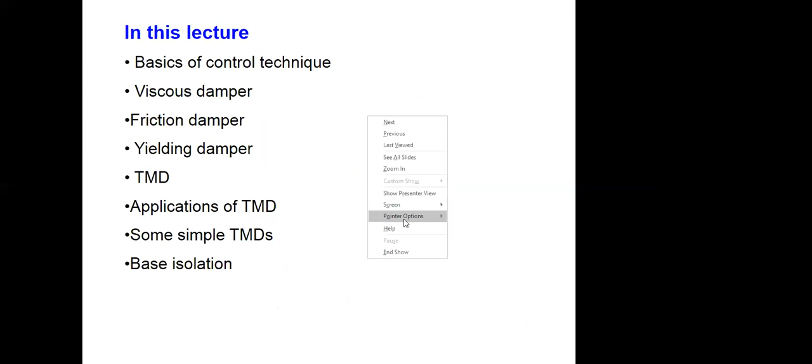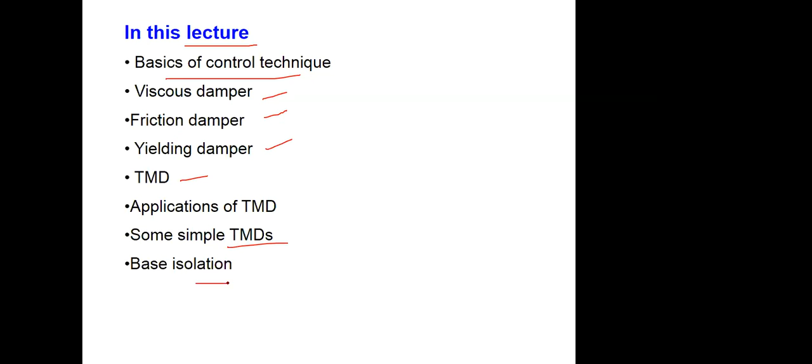So the broad outline of today's lecture is what is the basic principle, and then various types of dampers, particularly in earthquake engineering, which have been deployed and used: viscous, friction, yielding, and then tuned mass damper, TMD is the short form of that. Applications, some simple TMDs, and then we will discuss something about base isolation.

Before we go further, let me show you this video of an experiment done in a lab, but the building is almost full size, on a very big shake table. This facility is available in Japan, E-Defense. If you Google search E-Defense seismic testing facility, you will get a lot of such videos. So let us see how a structure vibrates during earthquake. This building is kept on the shake table, and in the lab that shake table will be operated.

Okay, so that was one. I think I don't know how to revert it. Okay, I want to play it. Yeah, it has played again.

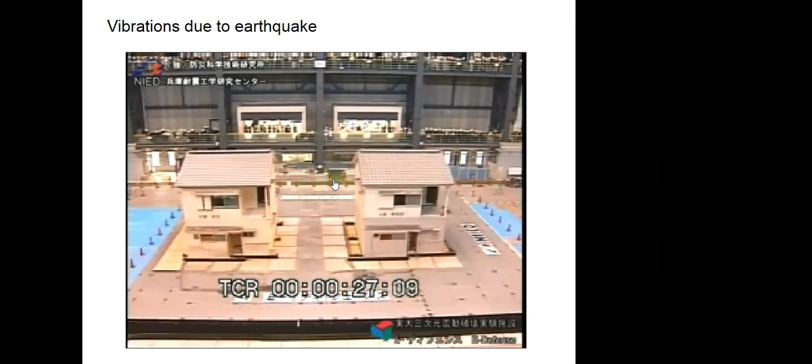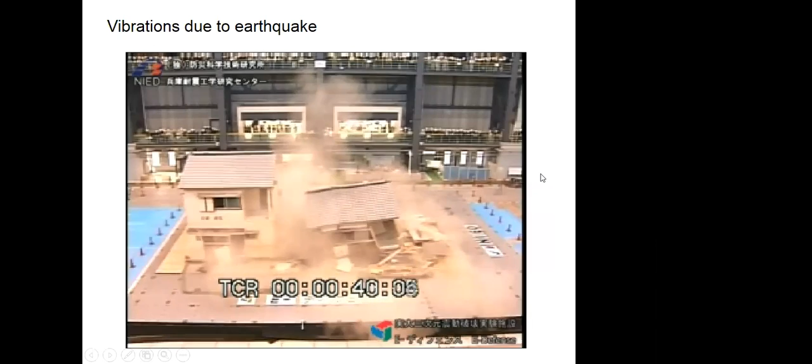Okay, so that is how things vibrate during earthquake, and we have to see how we go about controlling them. Now what are the parameters which affect the vibration? Of course, one parameter will be weight or mass, column size, stiffness. As by now we know the most important parameter or dynamic characteristic of any structure is natural frequency or natural period, and this natural frequency omega is under root k by m.

So how structure will vibrate will depend on what is its natural frequency. That is one of the most important things. Of course, then there are mode shapes, there are modal mass participation in various modes and things like that. Another very important one is damping. How much is the damping?

So if you want to control, one can always say that increase the column size or do something with the weight, change the natural frequency of the structure, your vibration will be different. So that is one way. Another way is that you enhance the damping. So somehow engineers have to play with these parameters. So for controlling, damping is the one which is dealt with in detail.

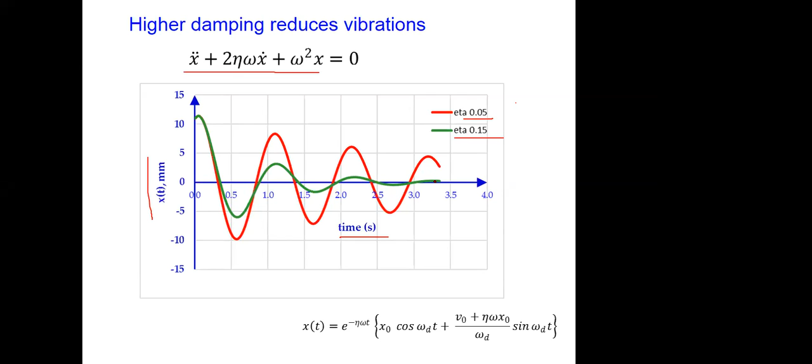So if eta is 5%, then vibrations are in red color. This is how it will die down. On x-axis we have time, on y-axis we have displacement. Now, if damping is made 15%, 0.05 means 5%, 0.15 means 15%, then vibration will start in a similar fashion, but now amplitude reduces drastically. So that is the effect of damping. If damping is more, vibrations will be less.

So damping controls the dynamic response in resonance band, resonance region, very effectively. So damping we have to enhance. Damping is our bet. We have to play with the damping. Now how to increase the damping?

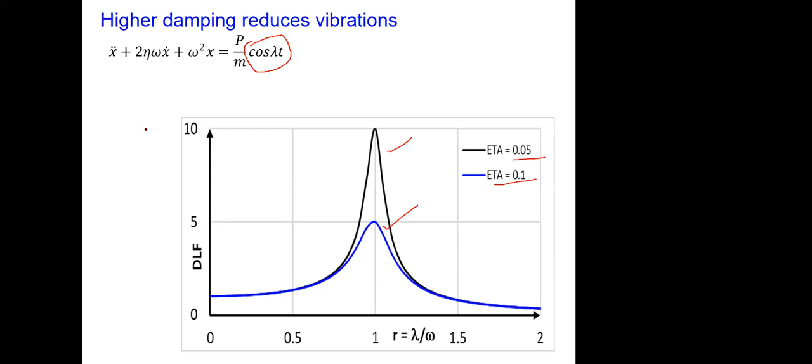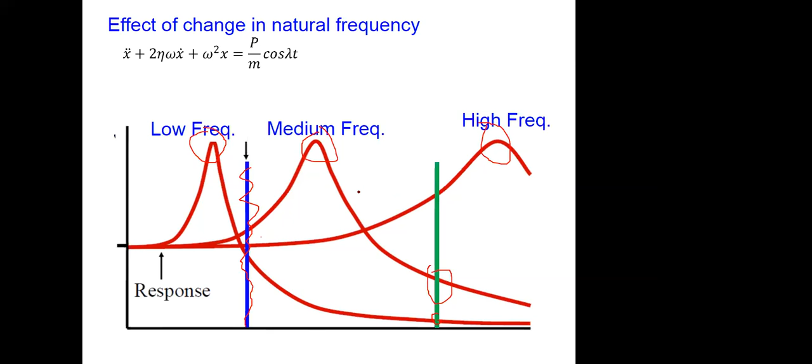Now, how to increase the damping? We have to increase the damping of buildings, structures, bridges, chimneys. But mechanical engineers very effectively increase the damping of a vehicle. All our four-wheelers, two-wheelers have suspension. They have a suspension unit. That suspension unit is nothing but the damping unit.

Now, if you put a different quality of liquid, or if you put more suspension units, then the damping of the car will increase. Then the car will have better ride quality. That is one of the differences between a low-cost car and a very costly car. Ride quality is good; they have better suspension. They have less noise and all sorts of things. But this is one of the criteria.

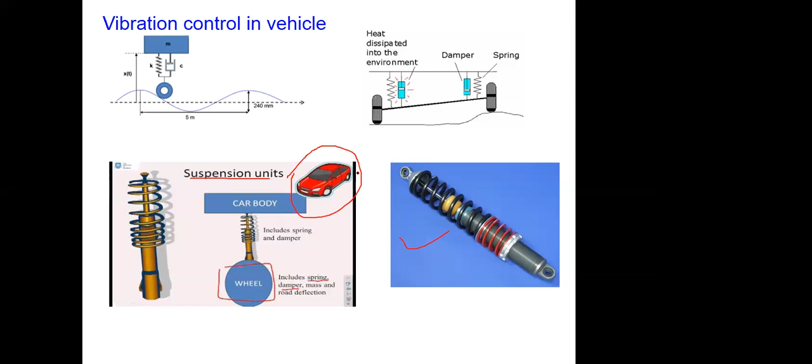Though there are other aspects also. We have passive control aspects and active control aspects. Active control means the control mechanism should come into picture when the building starts vibrating; otherwise it should not. Passive means that the mechanism lies there, like the suspension unit in the car. It is always there 24 by 7, whether the car is standing or traveling, though it comes into picture only when the car is traveling. When the car is standing, the suspension unit doesn't have any role, but it remains there. So that is called passive.

Something which remains always there, whether it is useful or not, whether the structure is vibrating or not, is known as a passive control device. An active control device is driven by a power supply. Only when the structure starts vibrating will the liquid, piston, or some other mechanisms come into picture, and they will generate an equal and opposite force, or they will absorb energy. Once the structure stops vibrating, this mechanism will also become inactive. So that is known as active.

And then there are various versions: combined, semi-active, hybrid. There are many types of devices. This table is useful particularly for students who have some curiosity in this field and want to go further. We will concentrate on passive control devices: yielding devices, friction devices, viscous damping devices, tuned mass dampers, tuned liquid dampers. Some of them we will discuss.

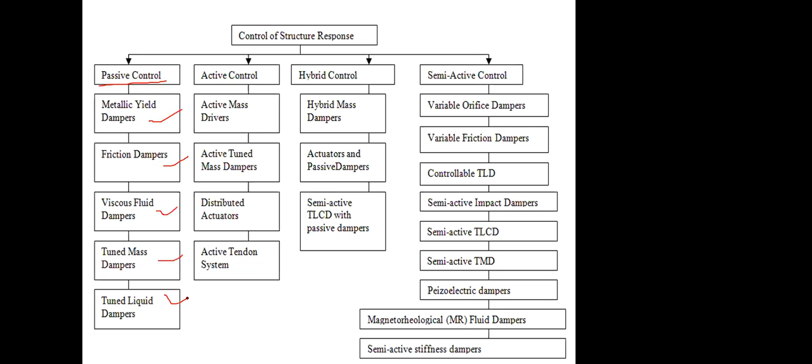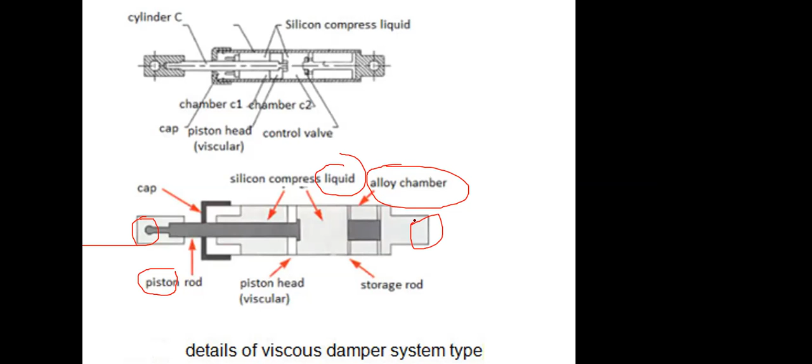Viscous damper. Typically a viscous damper comprises a piston and a chamber, and this is filled with liquid. One end is fixed on this side, another end is fixed on that side, and when there is relative movement between these two ends, the piston moves in and out against the liquid, and that provides the damping. These have been deployed in many structures.

Now, look at the suspension device of a car, the suspension device in a railway coach, and now look at the size of the suspension device in a building. The building is huge, so you will require very big suspension units. Nevertheless, as you can see from this figure, they have actually been fitted into buildings and bridges also. This figure is of a bridge. This is a building, this is also a building. So they have been deployed, and they have been effectively useful.

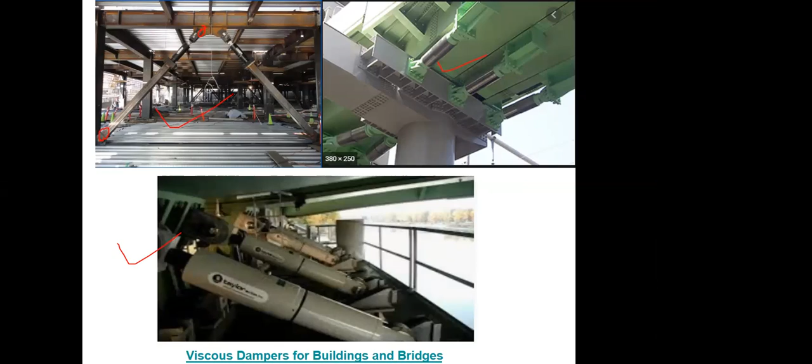Okay, so this one will tell you clearly that it doesn't obstruct the functionality of the building. It is very close to the wall, going from this end to the diagonally opposite end of the beam column joint and things like that.

And just to demonstrate how this works, there are two models in this video. One model is without viscous damper, the second model is with viscous damper. Now this is there on the shake table in a laboratory. They will start the shake table, and then you can see the distinctly different behavior. So let me play this video.

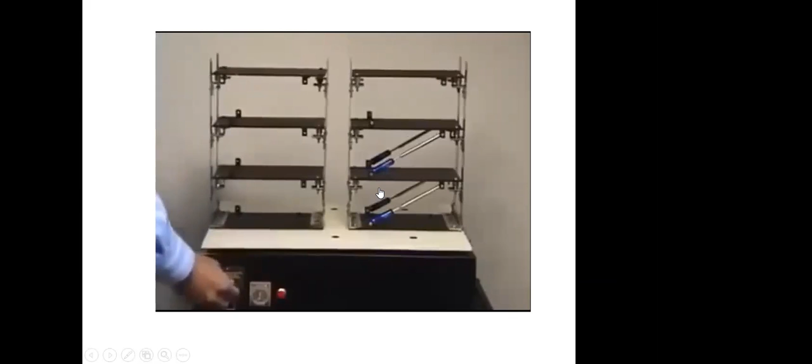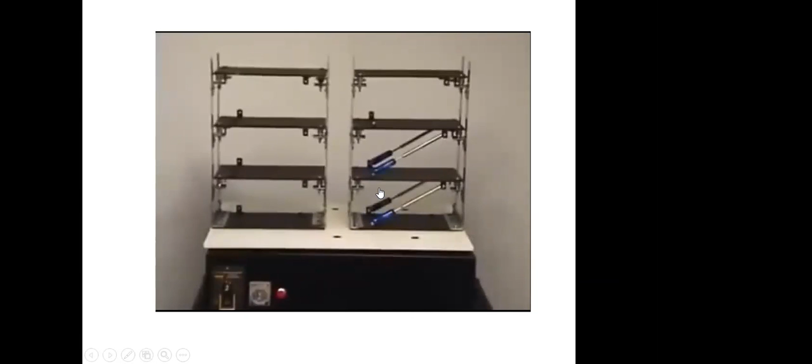See clearly the effect of the viscous damper. Vibrations have died down almost. This one doesn't vibrate at all, whereas the device without damper vibrates. Now how has damping come? Damping has come because of the viscosity of the fluid. That piston moves against the fluid.

Then there is a mechanism behind that. There is a theory behind that. There is maths behind that. One can work out what should be the viscosity of the liquid, how much should be the piston area, how many such devices should be applied, and what are the locations where they should be applied. So all that is a part of the work to be done by the designer, by the structural engineer,

so that they can effectively optimize. They have to find the optimum. You should not put too many; you should put the optimum number of devices. The next is the friction device. Let us see. There is a video here, so let us play that also.

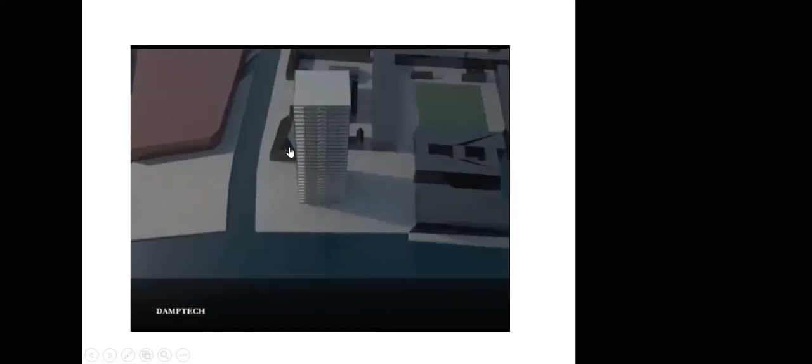Some of these videos are from commercial companies, but since they are good as far as clearing the concept is concerned, I have taken them. This is how friction works. See, there is a relative movement, then this will rub against this, and then friction. This will get heated up and will consume the energy. So that's a good demonstration of how a friction device acts.

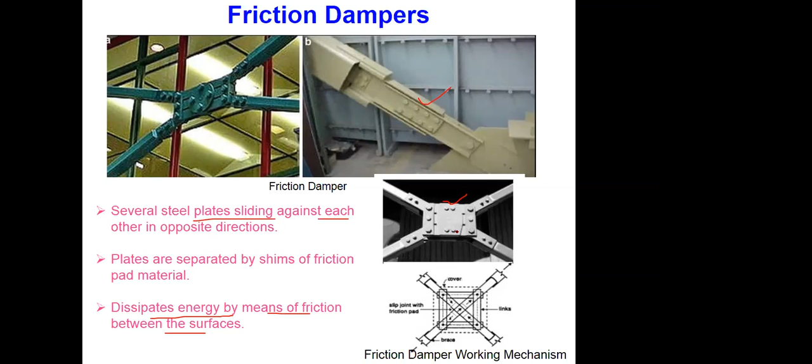There are many examples across the world where friction devices have been deployed. Excuse me. So they dissipate the energy by friction. It gets heated up. And one of the plates has to slide against another one. There are various ways of doing it. This is one way of doing it. There is another way, where there is a friction plate.

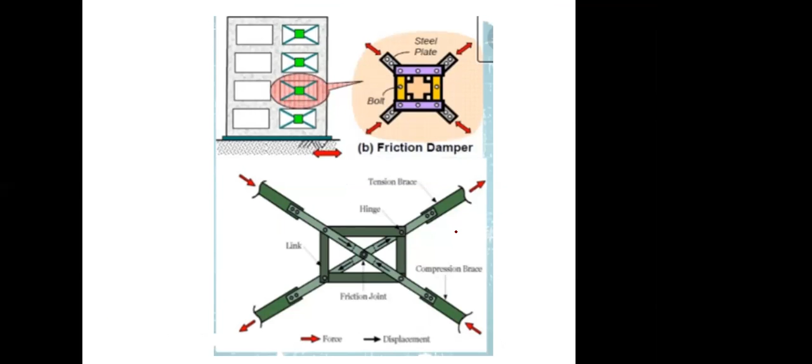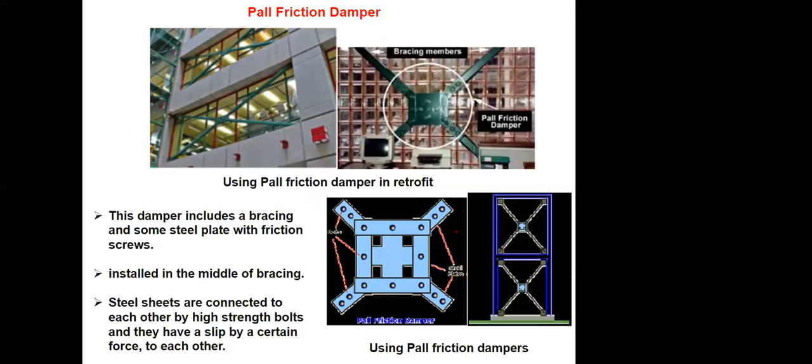And you will find a lot of literature wherein these things have been explained. This figure which you are seeing is from Earthquake Tips, and that is available on nicee.org. In one of the earlier lectures, I think I told you about that website. There you will find a document by the name Earthquake Tips, EQ Tips. So these are the friction devices in various forms. And since the aesthetics of the building should not get disturbed, they combine it in such a way that the building also looks good.

Yielding damper. Now, what is a yielding damper? See, the best example of yielding, if we have to understand, is bubble gum, chewing gum. Chewing gum always yields. The moment you try to stretch it, it yields. Look at a rubber band. A rubber band doesn't yield. It gets elongated, but you remove the force and the rubber band will come back to its original position. So that is elastic deformation.

Whereas bubble gum, the moment you stretch it and leave it, it doesn't come back to its original position. That is plastic deformation. So this difference we should understand. In rubber band stretching, whatever potential energy is stored is released once it comes back. Work done. Whereas bubble gum doesn't come back. So whatever force you applied has gone into stretching it, and it doesn't come back.

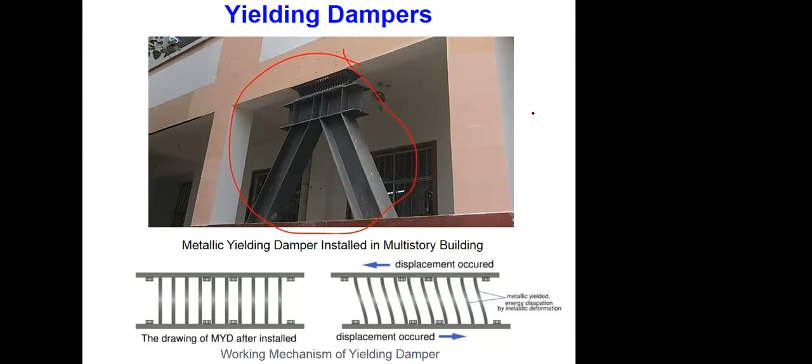So what they do, if I can demonstrate with the help of some more figures, there is a device like this. There is a top platform and a bottom, and there is some sort of V shape, two V's. This is a notch area, a very small area. Now if the top portion is connected to one part and the bottom portion is connected to another part, and there is a relative movement between these two parts, then this smaller cross section gets yielded, it fails.

Now, metallic failure is always a ductile failure. So since this is made up of metal, it yields. So when the part is vibrating this way and that way, this fellow also gets yielded, and in the process it consumes energy. So that is a yielding damper. There are various forms of that: this honeycomb type, and then thick and thin plate.

Now I'll show you a video, because by now we have discussed three types of dampers: viscous damper, friction damper, and yielding damper. This video is a bit longer, but it will be good that you see this, so that we understand various aspects. There are some persons involved. This is, I think, from some documentary for a television program. So please have a look at it, and then we will discuss further.

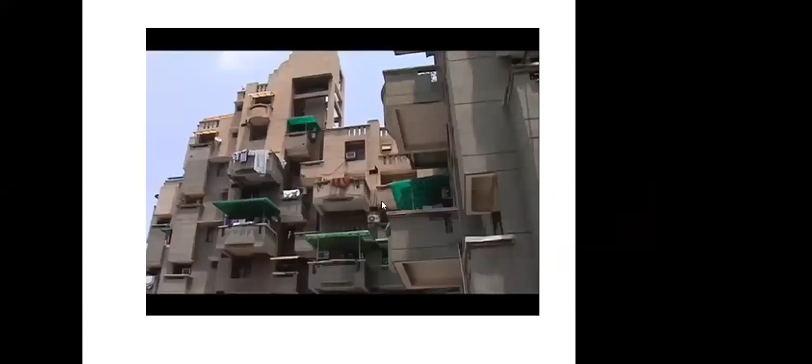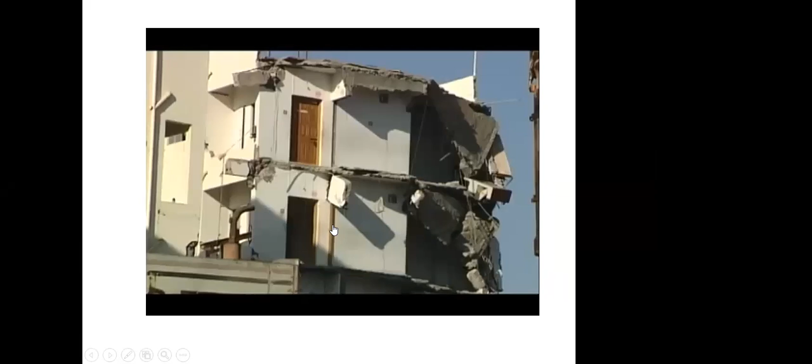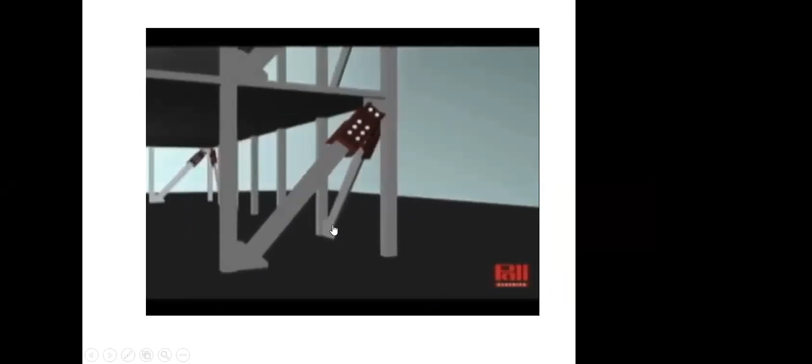Conventionally constructed buildings in India follow an old logic. The stronger and stiffer the building, the more structural muscle it has. But past examples prove that these common reinforced concrete or RC buildings fall apart during... modern science presents a solution where buildings are retrofitted with modern devices known as dampers. A damper is literally like putting a hydraulic shock absorber to brake the shaking of a building during an earthquake. The damper will dampen the displacement, which means minimize damage. Whenever there is a horizontal force, the building starts swaying, and the friction damper will start slipping. The minute it starts slipping, it is dissipating energy.

Now, what does an earthquake do? Earthquake pumps energy into a structure, but the structure is absorbing the energy. We want an external device to be installed which will dissipate the energy, much like an automobile brake. India has just begun toying with the idea of seismic dampers. Important structures like hospitals and now upscale residential buildings have adopted the most basic friction damper. These are steel braces that slip against each other, absorbing the massive energy produced during an earthquake. This is an example of a friction damper installed in this stilt building in Gurgaon.

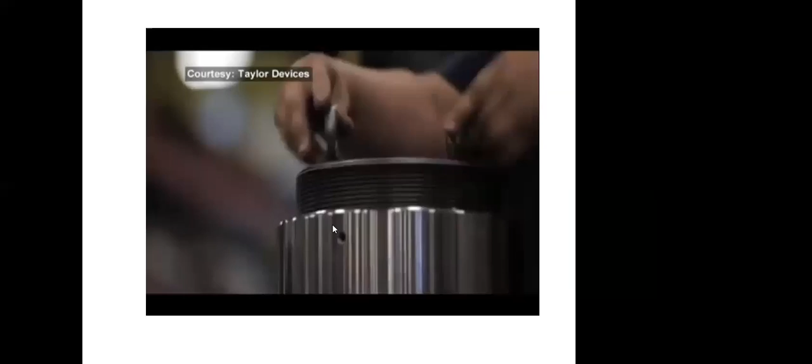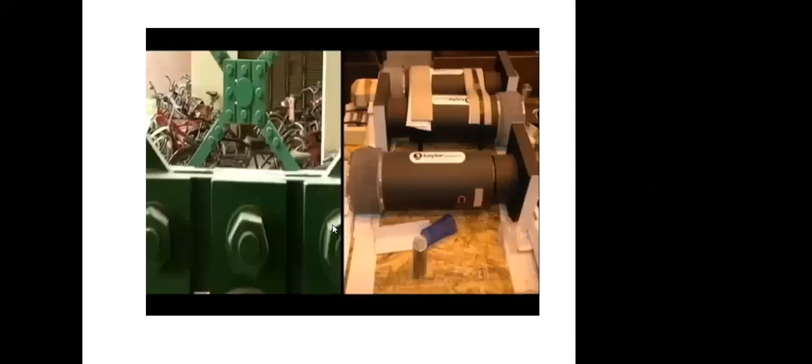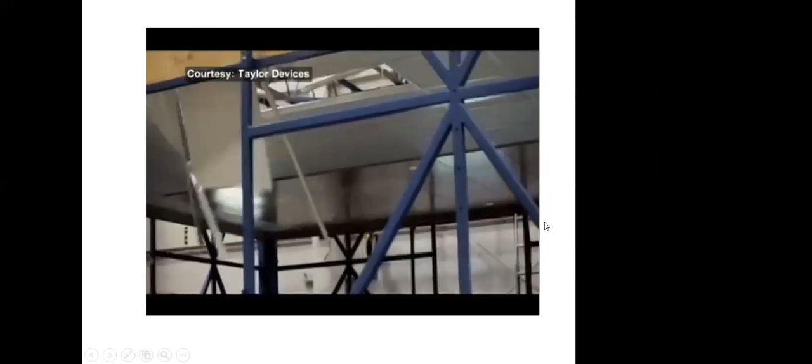Considered the most affordable by structural experts, friction dampers are known to last you a lifetime, with maintenance limited to just painting them regularly. Viscous dampers are the other type. They are piston-type cylinders that contain a silicone-based fluid to soak in the earthquake energy. Friction dampers are estimated to cost about 30 rupees per square foot, while viscous dampers come in a higher range, suitable for commercial structures. But mostly international players offer these two damping solutions in India. So how will we undertake a nationwide retrofitting effort if dampers demand big investment? IIT Delhi says it is close to a solution. It is testing out a prototype called the yielding damper, which it is targeting for the masses.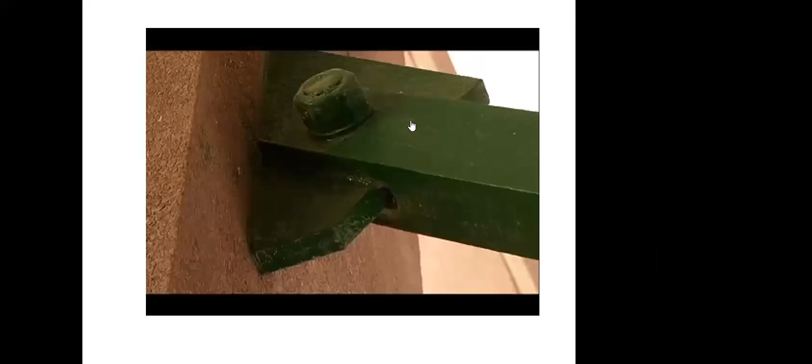So that was some documentary on this. So dampers are useful. They help in reducing the vibrations during earthquake, and even during wind. And now we discuss the tuned mass damper. TMD at VNIT, we have done a lot of work on this. Many of our past MTech students have worked on this. So maybe this I will explain in more detail. We have another 20 minutes or so.

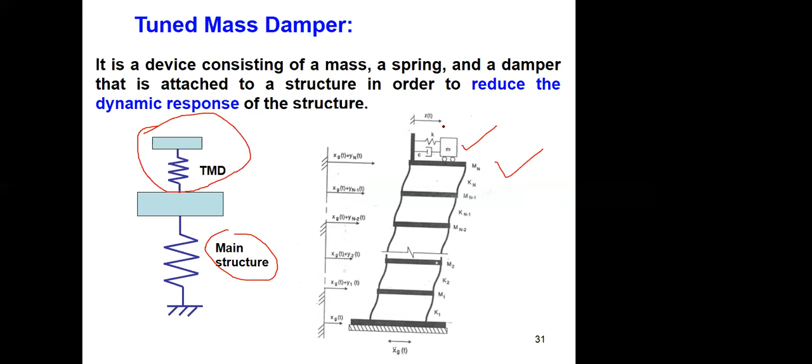So TMD is nothing but a secondary device which is kept on the main structure. Like this building shown here, and this single degree of freedom system, with mass, stiffness, and damper, kept there. So during an earthquake, this will vibrate more and the rest of the building will vibrate less. Now, how does it work? If you have to see that, again there is some animation available for that.

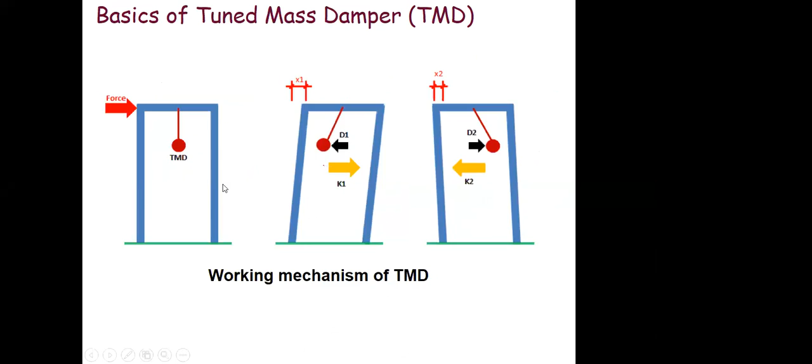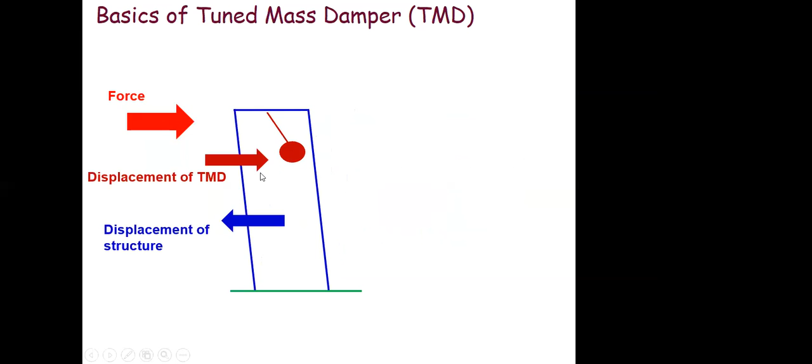If force is applied like this, the building will go from right to left, and this pendulum will go from left to right. The pendulum is our TMD. There is another video to demonstrate this. This fellow is the TMD, a pendulum kind of thing. PTMD, pendulum TMD. This is without control, no control. So let us see in this video how vibration gets controlled because of this pendulum. Pendulum vibrates more, building vibrates less. So with that background, let us see this video.

Right now the pendulum is locked, so it doesn't vibrate. It is vibrating along with the building. Now they have unlocked it. See now, the pendulum is vibrating more, the building doesn't vibrate. The second building is continuously vibrating. So let me play it again.

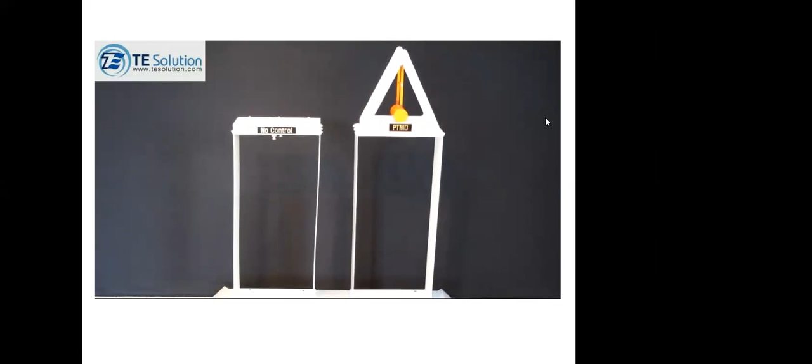So because of the TMD, this building vibrates less, and this building vibrates more. It has no control. Okay. So now this TMD, just to tell you a few things about it: its mass is MT, its damping CT, its stiffness KT, whereas the main building's mass is M, damping C, and stiffness K.

So how is a TMD quantified? It is quantified in terms of mu, the mass ratio: how much will be the mass of the TMD as compared to the mass of this building? And if you go further, it is quantified in terms of frequency ratio: what will be the ratio of the natural frequency of the TMD and the natural frequency of the building, and damping of the building and damping of the TMD.

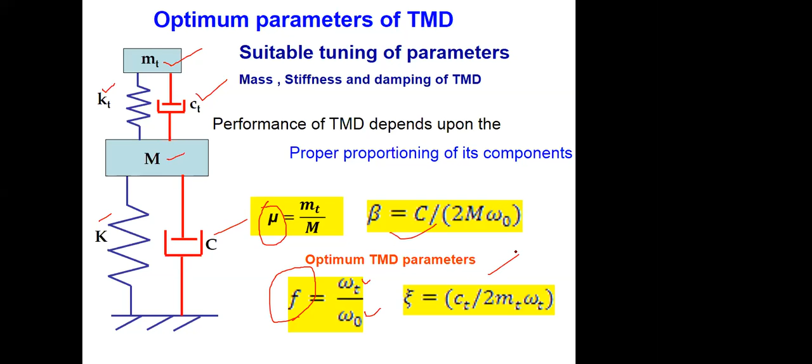So a lot of people have done research in this field, and they have given some optimum parameters, that you should have such and such value of frequency ratio, such and such value of damping ratio, then the TMD's performance will be best.

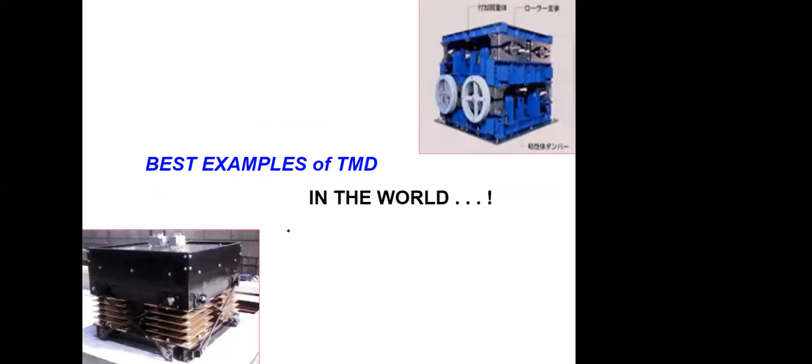Now I'll show you some of the pictures wherein TMD has been used in some of the buildings across the globe. A very famous example is Taipei 101. That building is about half a kilometer tall. Till a few years back, that was the tallest building in the world. But now, of course, the Dubai Burj and something else must have taken over. The Dubai Burj is almost 0.8 kilometer tall; this is 0.5 kilometer tall.

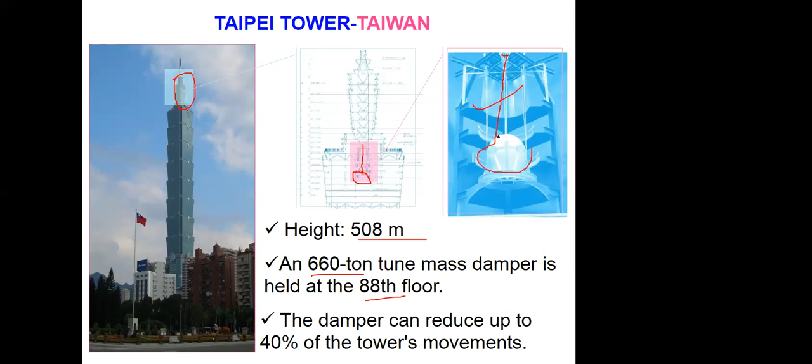So this is that. Now, so that this pendulum should not swing too much, they have put dampers also here. You can see these are viscous dampers. This is the schematic representation. So that is Taipei 101, very good. There are other buildings.

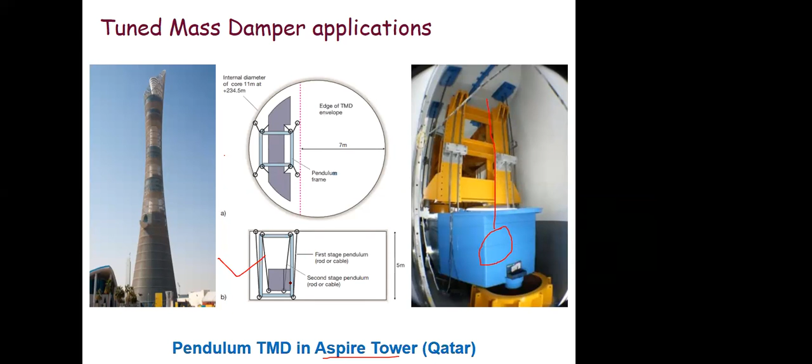Now see, this is in Qatar, Aspire Tower. Here also something has been suspended, and this is the mass. This is the heavy mass which has been suspended like a pendulum, and then it works. This schematic is shown here in this figure with the help of ropes. So this is a pendulum type TMD.

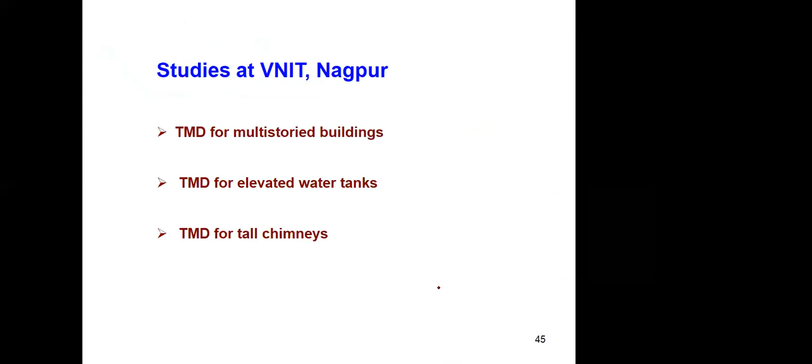Now some of the studies which we have done at VNIT, I will quickly take you through. We do it for buildings. Now what is the aim we kept? We said that in a country like ours, if you put a TMD like this, it requires maintenance. Springs will have to be oiled regularly, so inspection will be required regularly, because if this TMD gets rusted, and after 10 years there is an earthquake and it is out of place or non-functioning, then things will go wrong.

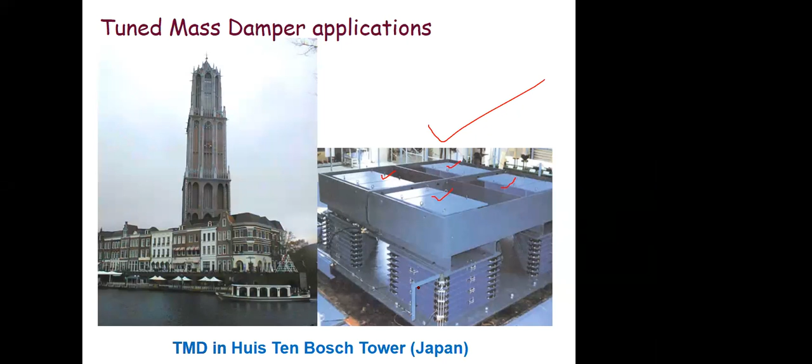So that should not happen. So what is our aim? We said that our TMD should be simple. Like we have an RCC building, let us put another RCC story here, which will be some sort of weak story. Its column size and beam size will be different, its slab thickness will be different, it may have walls or it may not, but it won't require any maintenance or any additional fabrication to construct it. The way our laborers are constructing the RC frame for the lower stories, the same way they can do this.

And its tuning is done properly, column size and everything is selected properly, so that during an earthquake this will vibrate more and the rest of the building will vibrate less. Now this top story vibrating more will be more dangerous. So one will have to take proper precautions so that even if it fails or gets damaged, it remains there only and doesn't fall down. Things like that can be worked out.

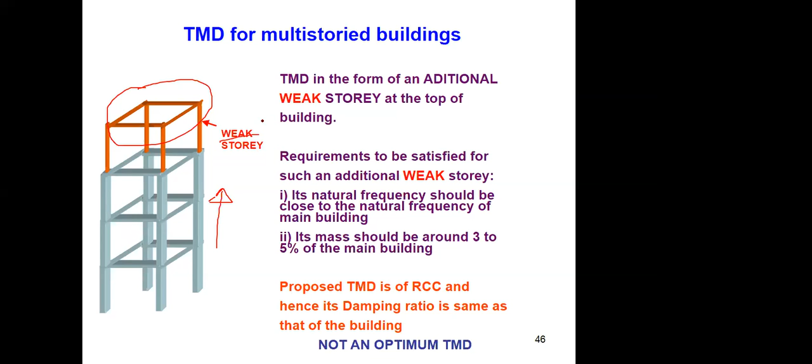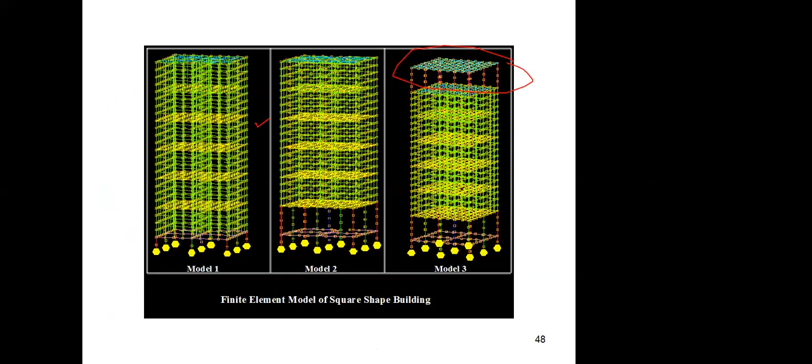But right now I am demonstrating to you how it is useful. So we have done this for a building like this. Here see, this building is normal, this building has a TMD at the top. Of course there is a parking floor at the bottom. So we have model 1, model 2, model 3, and we will see how.

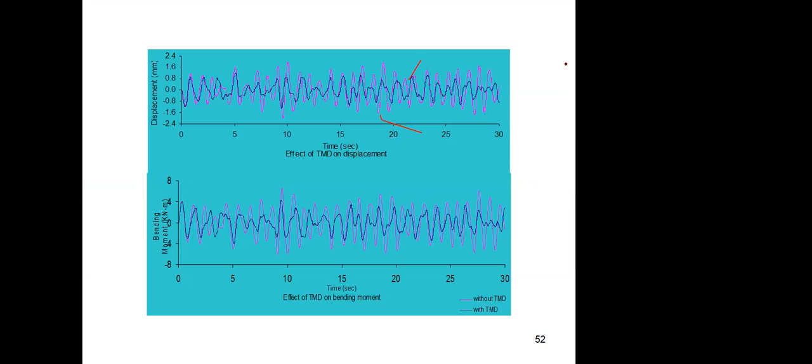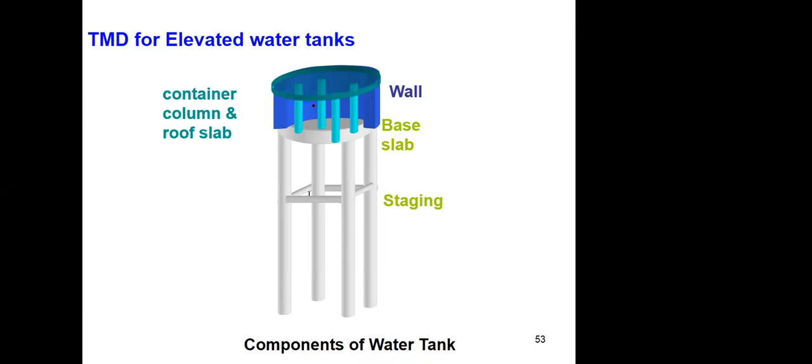Now, elevated water tank. See, it consists of staging. It consists of base slab, wall, then roof slab, and there are columns inside the container. If the container diameter is very large, to support the roof slab there are columns inside the water. So what we have proposed, see, our aim is to propose a simple mechanism. It may not be very effective, but it has to be simple. No maintenance, no additional technology to fabricate or construct it.

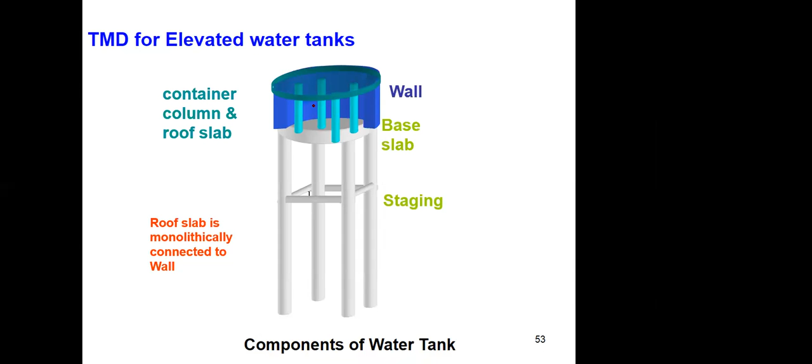So what we did, we created a gap between the roof slab and the wall. Vertically, they are detached. You can put a ball here so that laterally it is detached. It can vertically rest, but this slab should be free to move horizontally. So this roof slab and these inner columns together become the TMD. You will have to suitably change their sizes so that they are tuned. So you can do like this.

Without TMD is this model. With TMD is this model. And then you do the analysis. Elevated water tank analysis is governed by IS 1893 Part 2. We have discussed this in the previous lecture. You can do dynamic analysis, quasi-static analysis, or time history analysis.

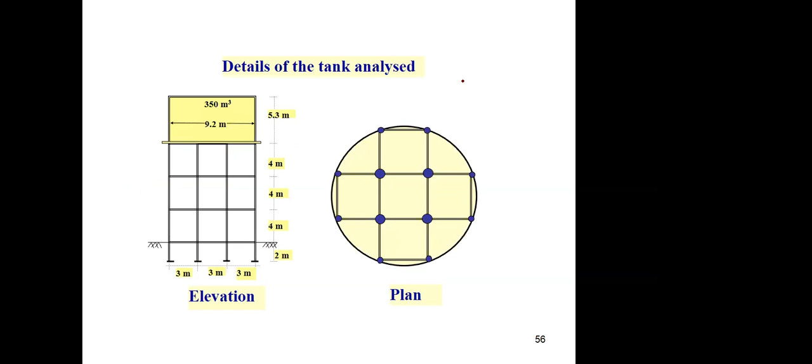So here for an actual water tank, this exercise has been done. This is a 12 column tank of about 3.5 lakh liter capacity. All sorts of analysis are done, and this is the result. Without TMD is red color, with TMD is blue color. You can see there is a reduction here in the top portion, the maximum response. And then as things vibrate, there is a decrease in the response.

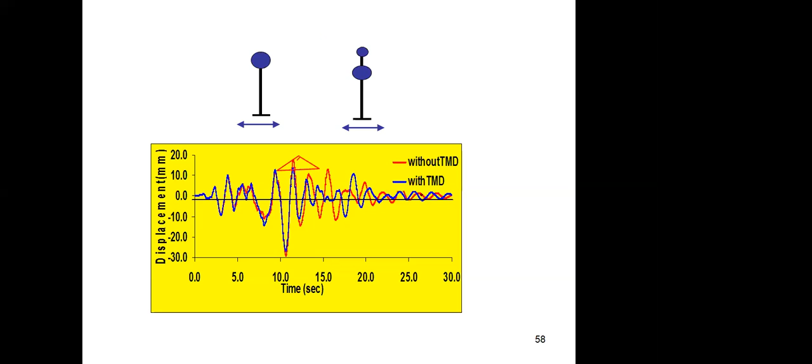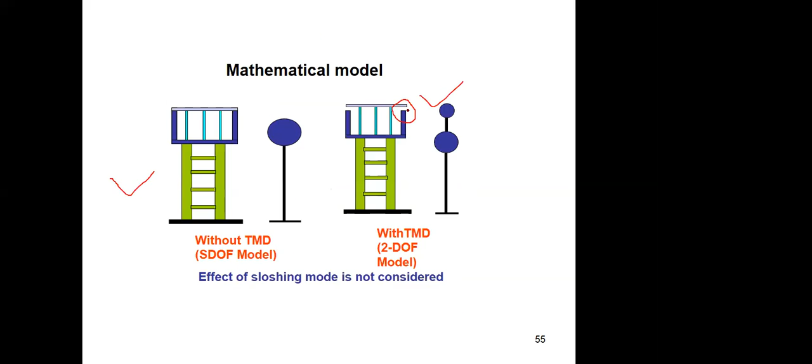So this is useful, not much, only 15% reduction. But very simple. You have to do nothing, in fact. You just detach there, put some asbestos sheet between the roof slab and the wall, put some material so that laterally they are free to displace.

Then chimney. Similarly for chimney. Typically a chimney consists of an RC shell outside, whatever we see. And inside there are flues, like here you will see. This is a flue, these two are flues, and there are platforms at regular intervals like this. There is a platform here, here, and here. You see this red color, they are platforms.

Through which this flue goes. Smoke goes through this flue, and this RC shell is just to support and protect it. But this RC shell is a major structural component whose vibrations... So these are various platforms at various levels. Now what does this platform consist of?

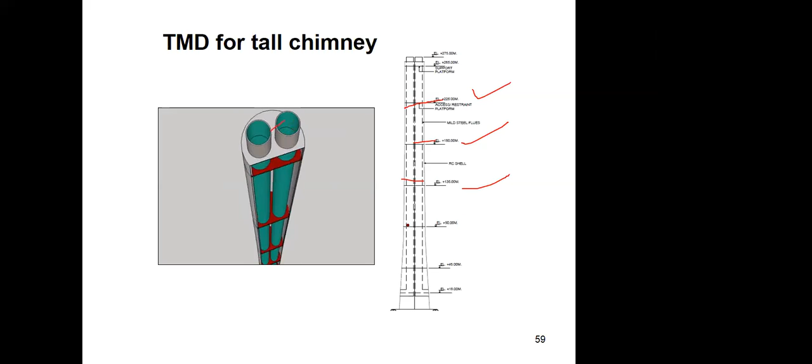This red color you are seeing here. See, it is like this platform. This is the figure of that platform. If you concentrate on this, there are two holes through which the flue will go. There is a truss. On that truss there is an RCC slab or steel grating. Steel grating that constitutes the platform.

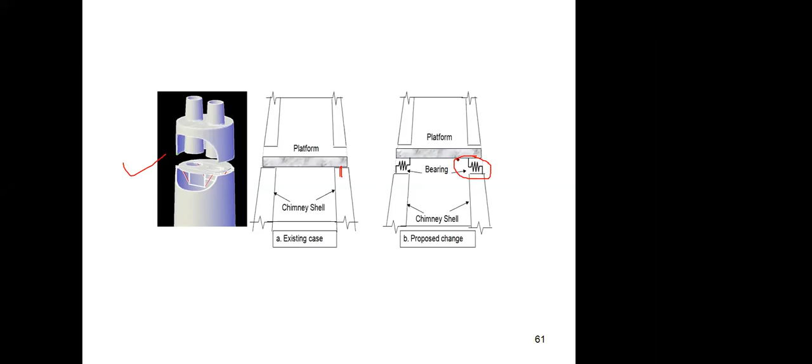So this platform is now resting on the RC shell. We said, between the platform and the RC shell, let us insert a bearing, the bearing which we use in bridges. Insert the bearing there, so that this platform and this bearing make a tuned mass damper. So that is how this TMD works, again very simple.

And this is the structural arrangement of that platform. Steel members. These two things are the holes for the flue. Now they will be resting on the RC shell at these 8 locations. This location, this location, this will be resting on shell, like this.

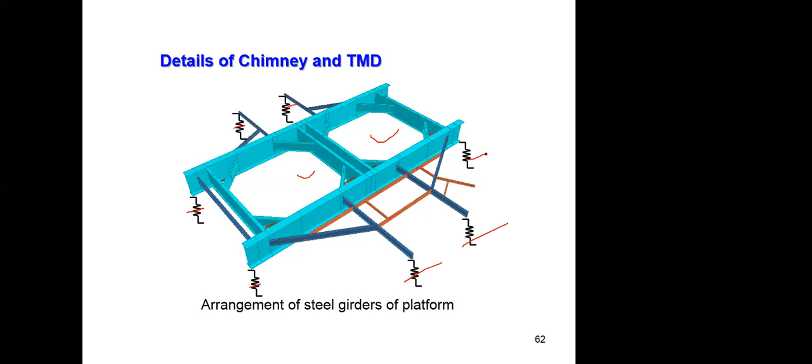Now what we are proposing: remove them and replace them by springs. Put elastomeric bearings used in bridges, something like that. But one will have to do all the calculations depending on the weight of the chimney and things like that and sort it out. Once you do this, then we perform the analysis of the chimney.

Wind analysis of chimneys in our country is governed by IS 4998. Those of you who are interested in wind response rather than earthquake response, IS 4998 is the wind code for chimneys. IS 875 Part 3 is the general wind code for buildings and other structures. So one can see the difference. What is that?

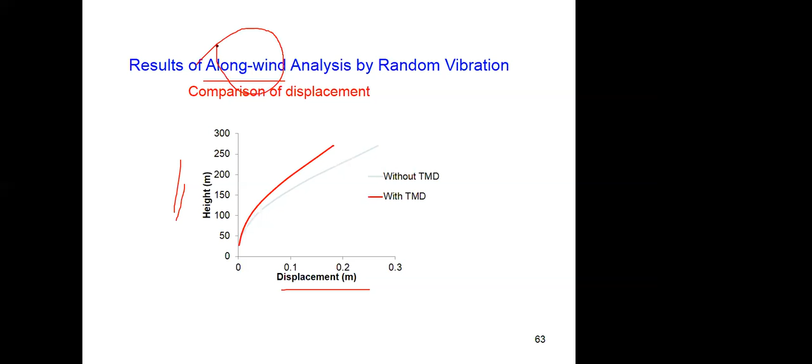This graph is displacement on the x-axis and height on the y-axis. So this is along-wind response. This word you should note down, along wind. In wind analysis, there are two types of responses, along wind and across wind. This red color is with TMD and this faint color is without TMD. So displacement does reduce.

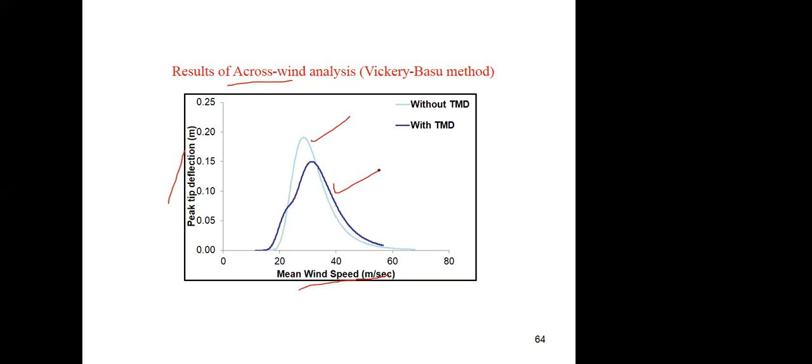Now what analysis was done, how this graph has come, that's a different story. For that we would need a course on wind analysis of structures. Along wind; now across wind. In across wind, for each velocity there is a peak response, and that peak response has been plotted as a function of velocity. Without TMD is this color and with TMD is this dark blue. So it reduces, particularly in the resonance region. Here also there is a resonance region.

Now that more or less completes the talk. But base isolation is very common. Nowadays it is increasing. In our country also, there are now at least 8 to 10 buildings which have base isolation. So let us see something about base isolation. Here I think there is a video. Let me come out of this pen option. Let us see this video, or let me give some brief introduction first, and then we'll go to that video.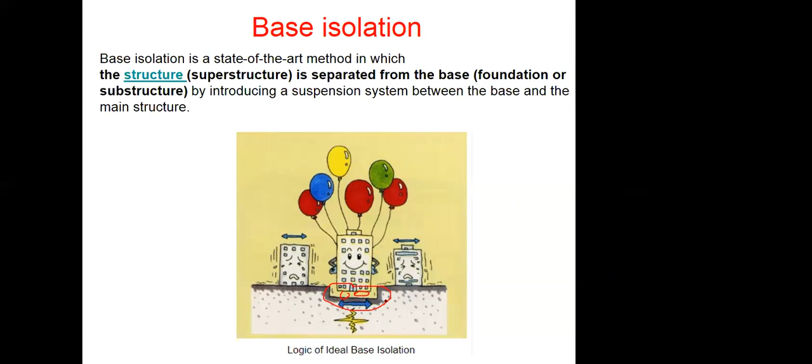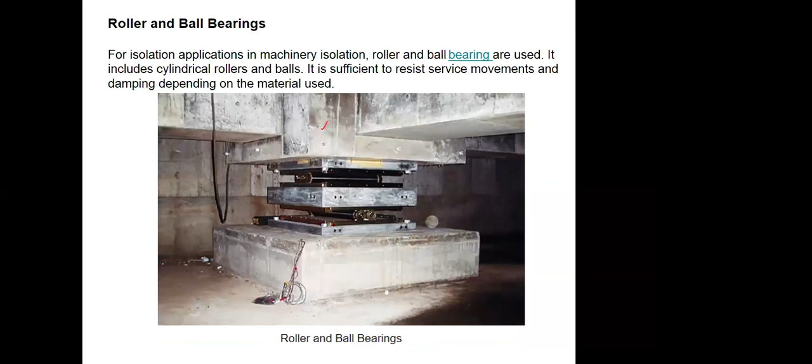Base isolation, what is it? In base isolation, somewhere near the foundation, it is as if you put rollers, and the building is resting on these rollers. So if the ground shakes, the building will just roll on. It won't vibrate. So this type of bearing is put at the base. Another one. This is the column of the building, and this is the base; they are inserted here. Now let us see the video.

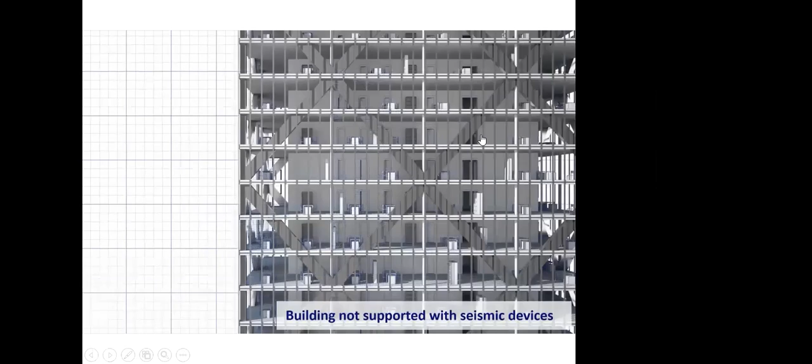Now, this is a building without base isolation. If the ground shakes, how the building will vibrate will be shown. This is a closer view of that. This is just a computer simulation animation to effectively convey it to the viewers. And of course, as I said, they are from commercial companies.

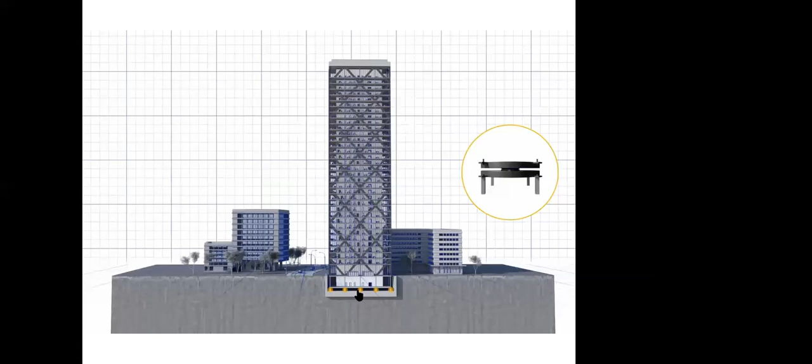Now see, they have put it on base isolation. This kind of isolation device has been put here: 1, 2, 3, 4, 5. Now if the ground vibrates, the building doesn't vibrate. Yeah, this is what happens. Closer view.

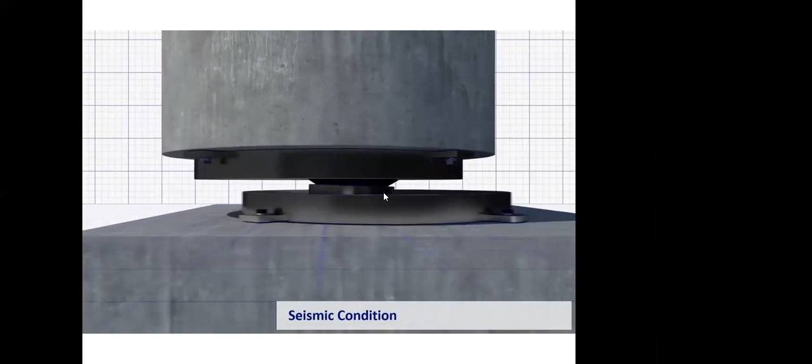So it gets centered also after the earthquake. So like this, it continues. Okay, base isolation is very good. Practicing engineers should start getting into this field. This is coming up now, particularly in those places where the seismic zone is higher. This will be required. There are different types of bearings and things like that.

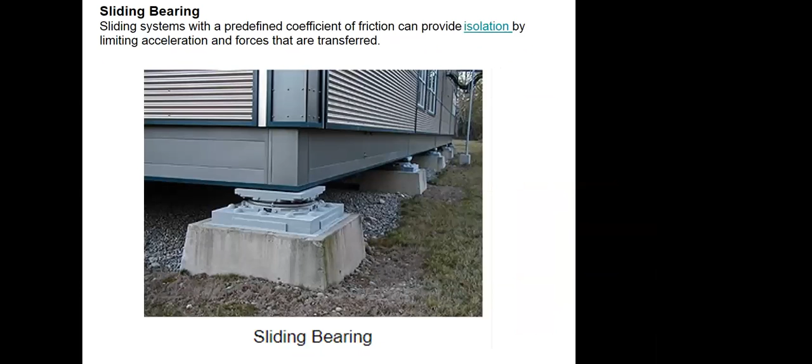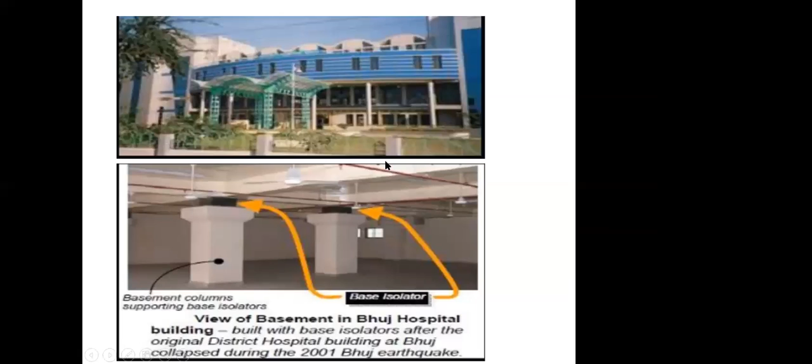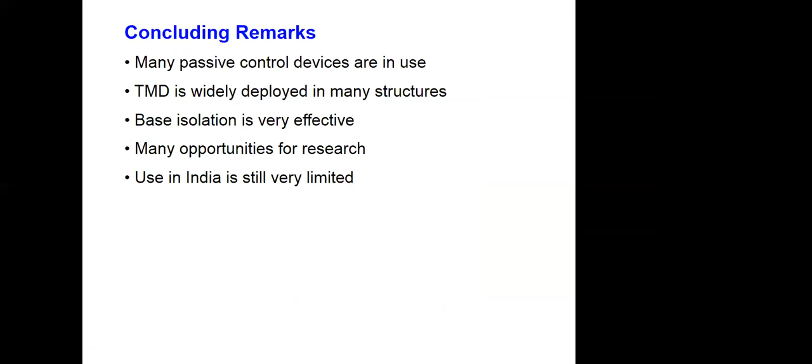So, conclusion. In the concluding remarks, passive devices are good. Base isolation is very effective. TMD also has been widely used, particularly for wind. Right now in India use is limited, but it will increase, and structural engineers should put more and more efforts in this direction.